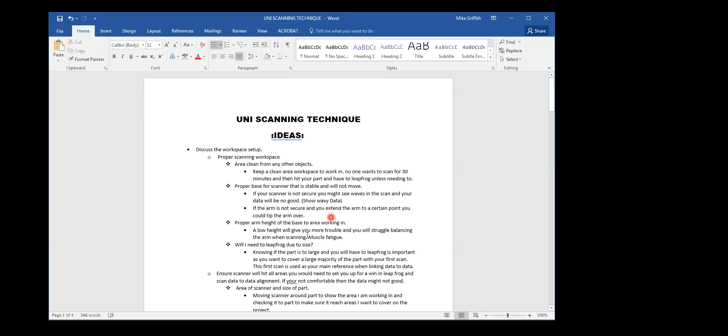The second thing we need to discuss is whether you will need to leapfrog due to the size of the part. If your part's too large, you need to know how many leapfrogs you're going to need, or how many times you're going to move the part around the scanner. It's important to get as much coverage in the first scan, as that will be your reference scan to leapfrog to all your other scans.

What I mean by that is when we have multiple scans, you could have 20 scans. In the first scan, we want a large majority of the part, a good percent covered. Then every scan will be locked into that reference scan, and each one will tie into it so that they link up and align very well.

You do want to ensure that your scanner will hit all areas that you want. Mostly you want to grab features that you're going to leapfrog to. When we do data-to-data alignments, you want good coverage of areas that will predominantly be your featured point data so that you can leapfrog successfully. I will show some of that later in the scans here.

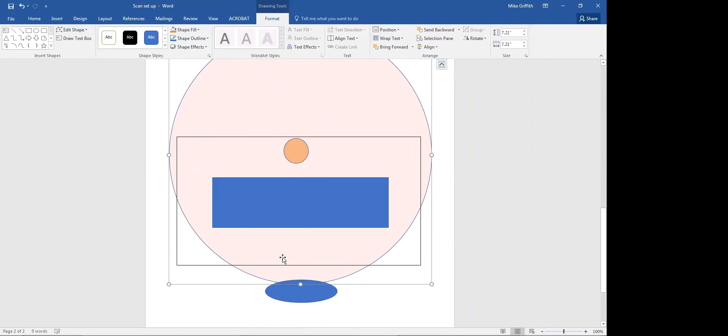And this blue square is my part. And I want the motion of the arm to be this outer circle. So if you can see this circle, I'm able to move around this part successfully and capture all areas of the part that I need.

An improper setup is one like this, where you can see here's the scanner, and I'm going to insert me into the picture. I'm right here. As you can see, the scanner is only capturing a small portion of the part, which means that I would have to leapfrog over to this corner to scan that much, and then probably leapfrog again to scan here.

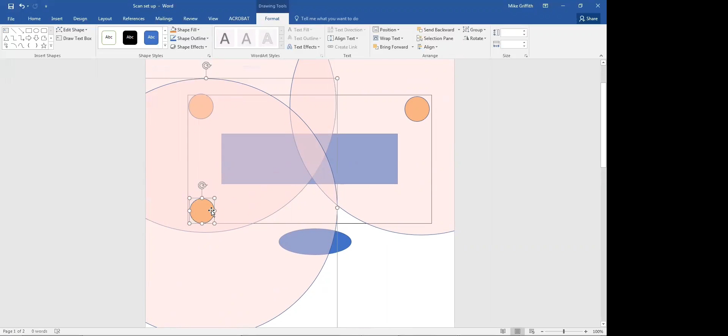So setting up your part successfully in the first place, like this, with the scanner away from you, able to capture all the part, is the proper setup. I've seen some where they've had it down here in the corner, and then they have to move the part 3-4 times to successfully scan the part.

So I do want to reiterate that this is really important, as the more scan data you collect, the more data you're going to have and the slower your computer will be in time. So just remember that this is probably the most accurate technique that you can have for setting up.

Everybody, can you see that all right? Yeah, we can. Okay. I wasn't sure. All right. We'll go back to this. All right.

The next thing I want to jump into is when to properly use developer spray on plastic or shiny metal, and when not to. I've dealt with a lot of plastic in my days. I did 6 years of scanning plastic, so I'm primarily really knowledgeable in plastic. I'm getting familiar with doing metal more. Metal's a little easier to work with than plastic.

So I'll have a diagram here to show you what kind of happens when you scan plastic. So I have 2 diagrams here. The top one is scanning plastic with no developer spray. Certain plastics, whether it be transparent, light colored, yellow, light gray, I've dealt with many colors.

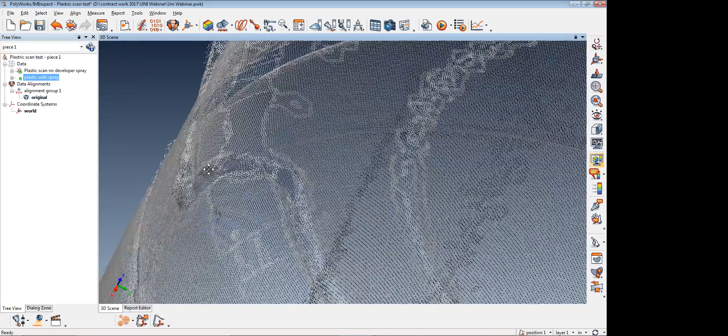So the first scan that I did, as you can see here, was scanned with no developer spray. As you can see, as I zoom in, you can see where the plastic is creating noise on the outside of the part here. I'm going to turn up these pixel sizes. So you can see it's hitting in the part, bouncing outside, creating a lot of noise.

You're starting to get jagged edges right here. And it's data that we're not really wanting. If we were to measure certain surface profiles of this cap, it would pick up these pixels and it would give us inaccurate data. This cap was yellow. I just used an Armor All lid that was sitting around the house.

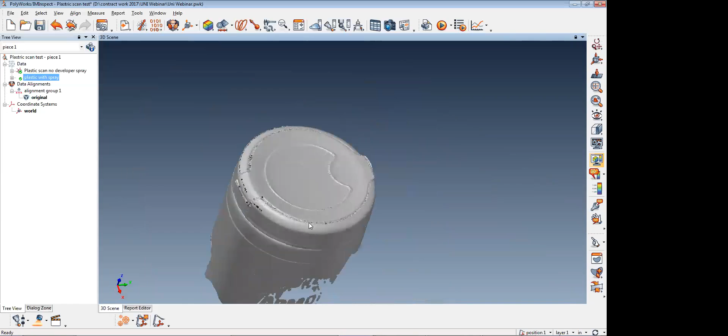Then I went outside and took the same lid and I scanned it with developer spray. It took about 2 minutes. And as you can see, compared to the other data, the areas that we were having difficulty with, the bouncing and the reflectiveness of the part, we now do not have any noise on the outside edge. So you really want to look for, is my laser transparently shooting through the part or not? If it is, this is a good indication that you need to use developer spray.

Another way of possibly getting rid of that noise is to check the intensity of your laser, which is in your RDS. And I'll show that here. In your scanner settings, right now I was scanning with 30%. This changes your exposure time. You can switch between different modes. Right now I have capture, so I can grab the arm, the 2 buttons on the side.

I point that laser at the part. I press the 2 buttons on the side, and it'll beep, and then it starts registering the exposure time on that particular part. After it captures that, it gives me another beep. You'll see the intensity of the laser go high and low. And sometimes that will just be all that you need. If that does not work, you'll have to really go for the developer spray.

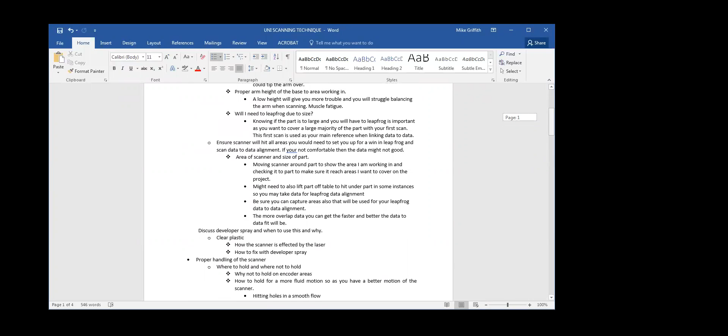All right. Mike, I have a question before you move on. Sure. Do you have recommendations for cleaning developer off the plastic parts when you're done? I just use water. Okay. Just water and a brush. The developer spray that I use is recommended that you wear plastic gloves when you're cleaning. But yeah, water, soap, it comes right off. It's washable. It's just you don't want to get it in contact with your own skin when it's in water.

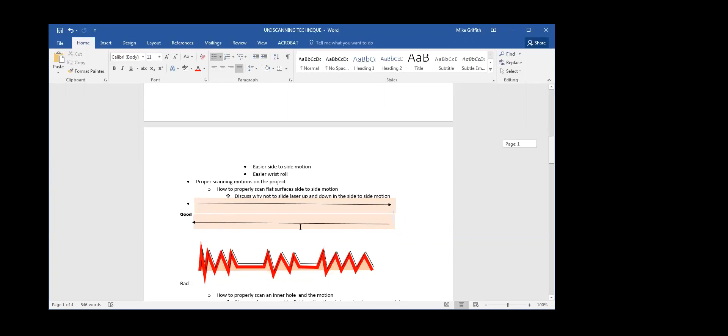All right. So now we're going to discuss a fluid motion of scanning, how to properly scan the part. As you can see in this image here, a good motion of scanning is a side-to-side motion. We do not want to scan sliding up and down. And I'm going to show you why.

Get a new screen here. Lots of screens. I'm sorry, guys.

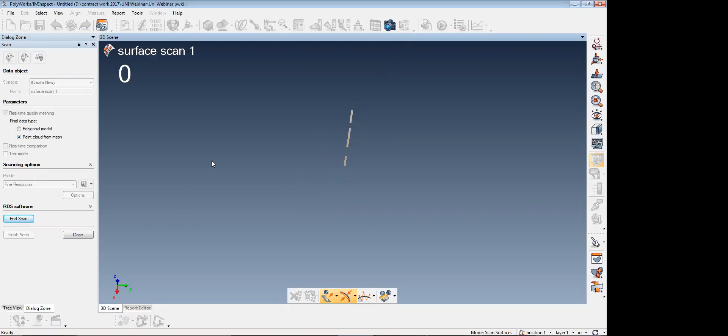Yep. So as I'm scanning, and I have a part right here in front of me, we want the motion of our scan to go side to side. So as I'm scanning, I'm going through the part. I'm at the edge of the part. I'm going to scan right back through the part. We just want a back and forth paint motion of the part, like so.

We do not want to give an up and down motion. Now I'm going to pretty much do the same scan, but I'm going to kind of rotate my wrist up and down and scan, and you'll see as I scan up and down, we start to miss data.

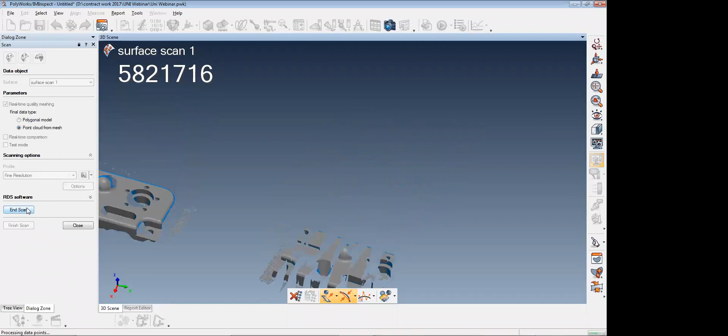So you can see as we're scanning, you really want a good paintbrush motion across the part, as it'll capture as much data as you need. I've pretty much got a large majority of this part in the first scan, and we're going to have to scan quite a bit if we were to do that motion on this one.

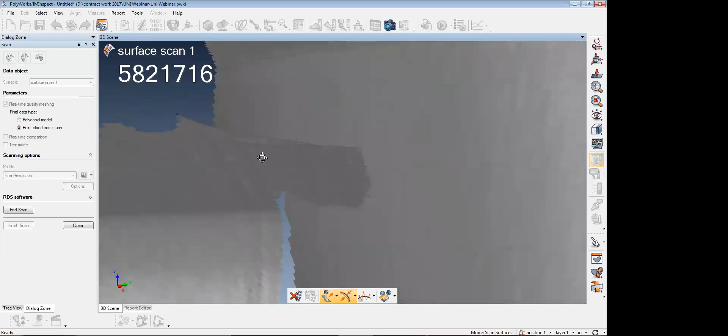And also, as you can see here, I'm going to zoom in a little bit. As you go up and down with the scanner, you can see that it's starting to create ripples in our scan. I've done this many years, and it's really hard for me to even get those anymore. But you can see we have one there. And it'll cause some inconsistency. There's a really good one right there.

You can see the inconsistencies in the surface as far as how not to put the laser in and how not to drag the laser up and down with it. You really want to go across the part with the laser covering across the part in the side-to-side motion. And we can kind of see how smooth my scan is here. There's not really any vibrations. We got a little bit here, but that's because the laser is starting to fade off on the ends.

So I've stopped about right here. I could have finished and it would fix that. If I came on the back side of the part, it would fix that. So really just maintain a very good side-to-side motion. Right here. Don't go up and down.

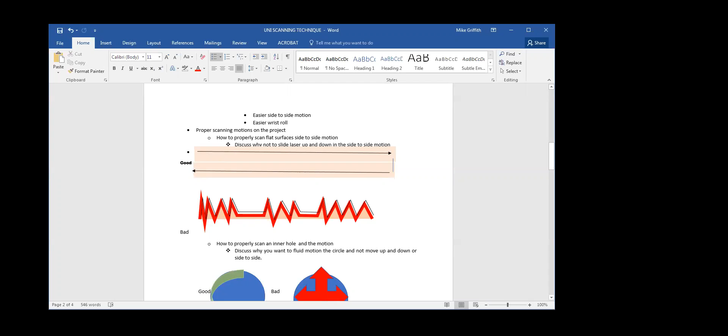Now we're going to talk about how to properly scan an inner hole and the motion. When we discuss holes, this could be holes, the top of caps, the top of cylinders. We really want to create a rotational motion of this. We do not want to scan straight side-to-side motion. And I'm going to show a little of that. I have a demonstration here that I did.

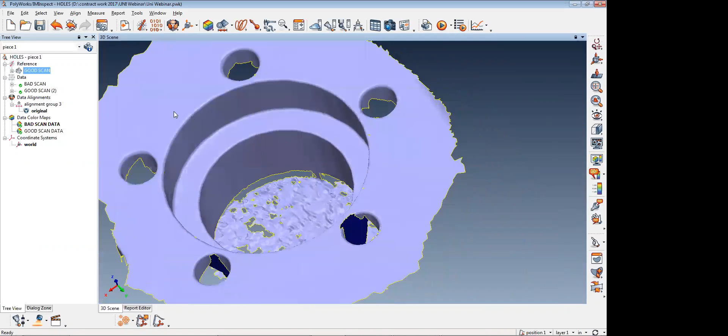All right. I'm going to turn that off for a minute. So this was a scan I did yesterday. I cut off all the other excess so we can just look at the hole. As you can see, there's very little ripples. These little ones that you see are just the pixels of the actual scan. It's just polygons. So I did a bad scan.

And as you can see, the scan here, what I did was I took my scanner and I took my hole and I went down the hole in a downward motion like so. Just like that. Now PolyWorks has a built-in plugin for a surface to normal angle. That is this blue area.

What that means is that the scanner is at such an angle that the software is trying to interpret the surface, but we are beyond our scope of 55 degrees, so the scanner is suggesting that we rescan the surface to make sure that we are accurately capturing the data there. The other is the curvature. It's low scan density for mesh curvature.

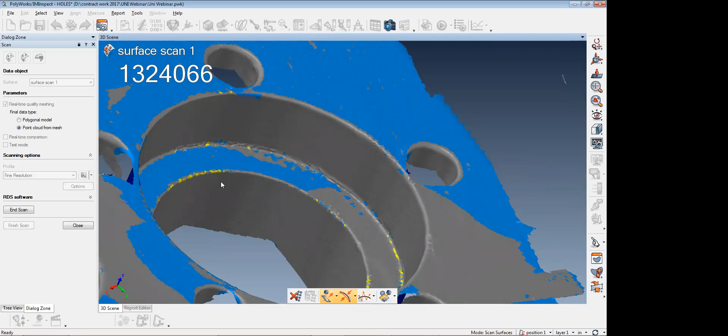So essentially, it's trying to build this curvature, but it's not sure, because we were coming down at a direct angle onto this surface, where the angle is and the curvature of that curve is. The proper technique that I'm discussing is to, we'll hide that one, take your hole and shoot the laser in a curvature motion, at least a 55-degree angle.

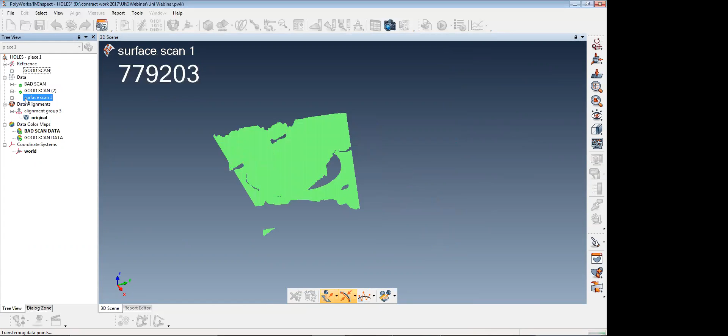Oh, sorry. Yeah. Like so. And all I'm doing is sweeping, motioning, and it's showing me the blue is a little high on my angle, so I just brought my arm up just a little bit more. Now you can see I've got the right angle, and I'm starting to sweep motion around the hole. Like so.

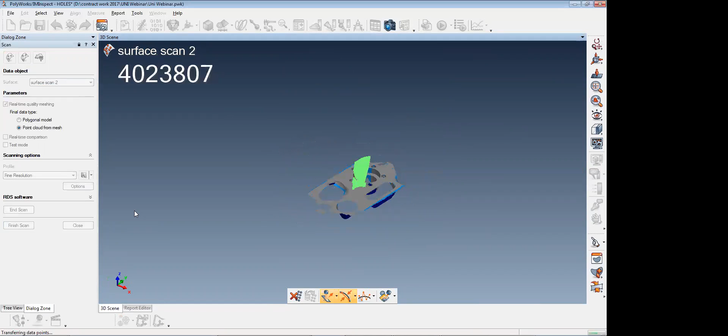And as you can see, with a little bit of practice, a little bit of time, I have a little bit of areas that I need to finish. Just need to probably rescan one pass right here in the curve, and I can cover most of the part with the software. Hardly suggesting anywhere to fix or rescan. And you can see the clear data there. This is with proper scanning.

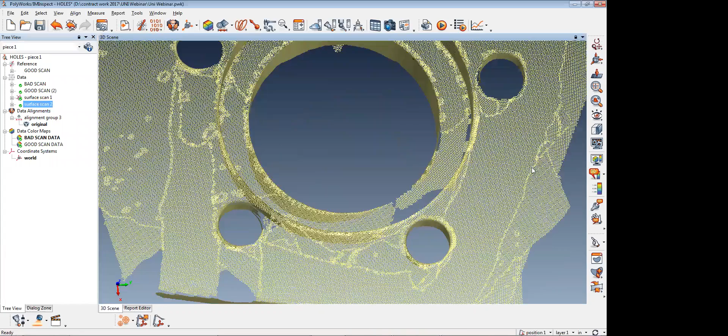And here's the data without. And you can see the different ripples that are in these areas. You can see the density of areas. And what you come up with is what I have here. This is a scan that I did earlier today on that same pass. And this is the color mapping.

And as you can see, I have a few areas that are just at 5 thou. I have 2 thou. But we're pretty close to the surface as much as possible. When I match a bad scan to the surface, you can see how we're starting to get a lot of error inside. I've got 5 thou, 8 thou, 4 thou. I've even hit as far as up to 8 thou in these areas.

So as you can see from the data, doing a rotational motion, if you're trying to get a couple thou more out of your scanner, rotating through the actual cylinder at a right angle will give you the better scan of a hole. Does anybody have any questions on that?

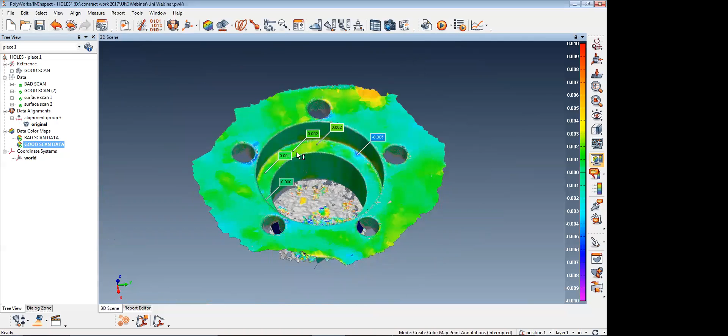This is Lee. I have a question. So is this going to apply if you had like a cylinder as well? Would you go around the cylinder on the outside in the circular rotation? Yes. Okay. Yes. I'll grab a cylinder here for you. So I'm going to do the good pass first on the cylinder.

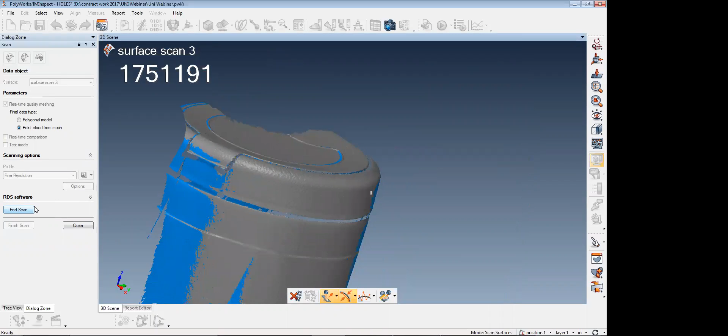So as I'm directly out of radius on the cylinder, I'm going to kind of scroll around the top of it like this. So you can see right there, I captured the smooth data there. And you can do that just all the way around. When you get to the sides of a cylinder, we're going to discuss that. But as far as the top corner edge of a cylinder, you want to do that motion.

And now I'm going to show how if we go down, a downward motion, we're just going to go up and down. As you can see, the up and down motion didn't capture anything on top. And the arm just finding that right angle to capture the data is just not there. So you'd have to take more scans really to get acceptable data.

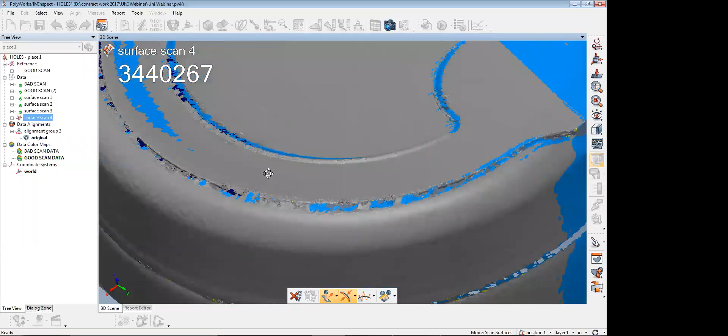So I went to the top, and as you can see, the noise, this is the same part. So no noise, very smooth inside this, and it's maybe a millimeter or two hole there. We're getting very smooth data there. And as you scan up and down, you can see it's very jagged. There's some noise sticking up all the way through. We don't need that. We don't want that. We want very smooth data, very smooth lines, always.

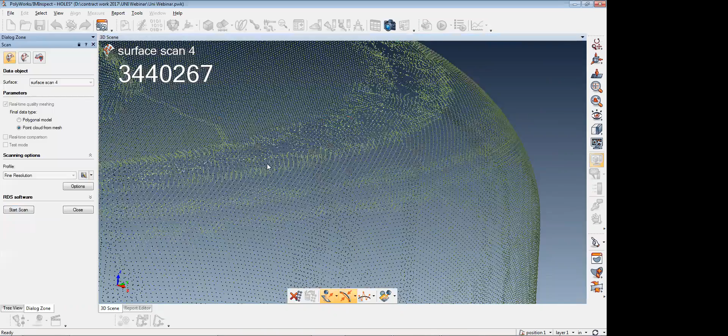And here's kind of a picture of the noise. Can you see that all right? Or do I need to bump these up? So you can see all the noise that's running around in our scan. Whereas if we zoom in, there's no noise there. We can see a smooth edge in that one. So it is necessary when you're doing corners also to do that. And I have a corner check here that we're going to do in a bit. Does anybody have any questions on holes?

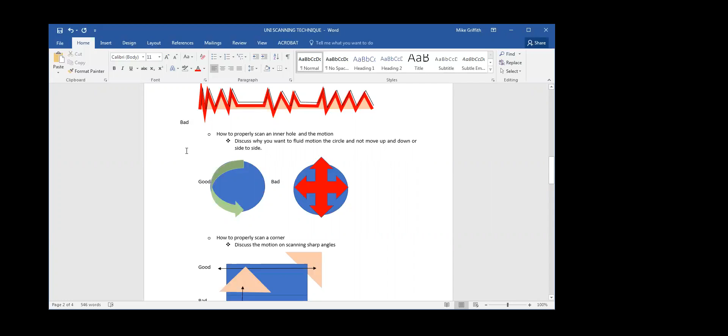All right. I'm going to go back to our page here. So the next scanning technique that I'd like to discuss is any corners or edges. As you can see, I have an image here. We want to go with this being the corner edge. We want to go with the edge in a sideways motion. This is our scanner. So we're going to kind of go like this on these corners, and then we would go like this on our corners. You do not want to go on the edge and scan like this. And I'm going to pull up a corner scan.

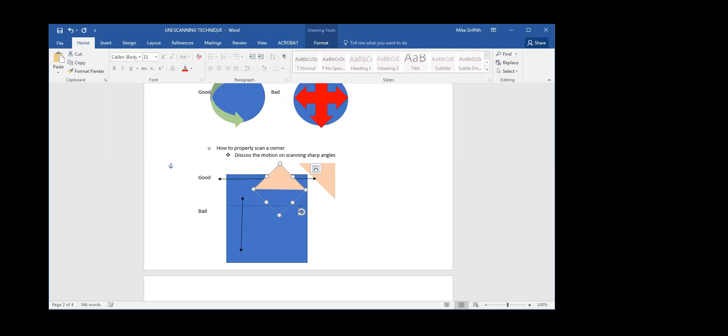Give it a minute here to load up. All right. So we're measuring corners or edges. We really want to define our corner. We want to get it in the proper 55-degree angle that I have on my scanner set up. And we want to go in a side-to-side motion, covering both sides of the corner.

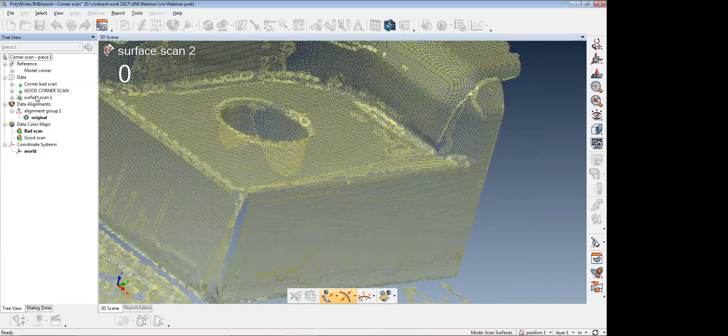Sorry if that's small. Like so. Just like that. And we do not want to scan in an up and down motion. Like so.

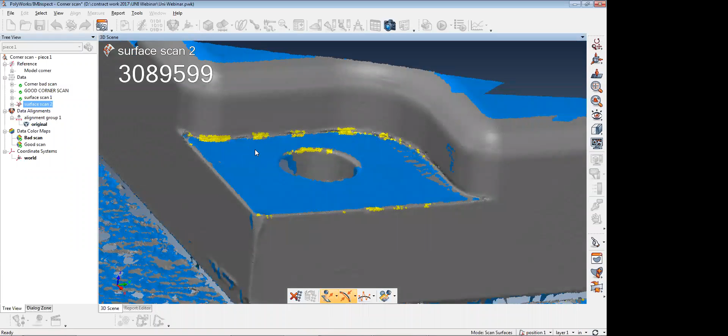As you can see, we're getting some curvature errors on that scan. We're getting some surface errors here as far as knowing if it's the right angle that the scan is. And when I scanned the proper way, you can see we have a little bit on top. I can just do maybe one more pass.

It would fix this area. And I could do another pass here in the corner to fix this area. And maybe a radius scan pass to fix this area right here. And then we would be done. So it would probably take another 4 or 5 in the bad scan and maybe 1 or 2 passes to fix the good scan. And then I'm going to show you some examples that I have set up.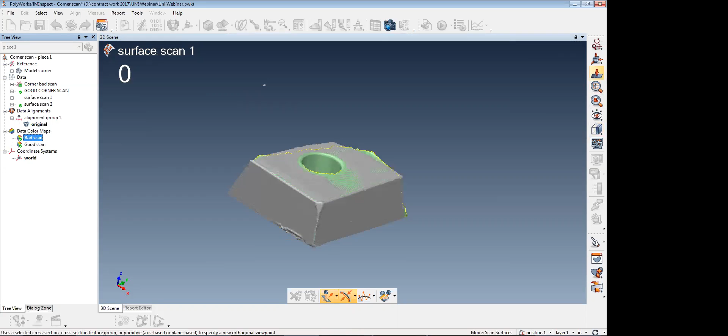The first one, I'm going to show the corner bad scan. I'm going to show you the color graph of that. So as you can see here, we got some areas that are sitting about 6 thou, 5 thou, even some that are hitting +5 going -5. So we're looking at 10 thou overall error in our scan.

And then the next one I'm going to show is a good scan in the corner. And as you can see in the good scan, the area that we were hitting 5, we are now hitting 1 to 2 thou in those areas. So we're looking pretty good. I would be very comfortable with a scan like this. Does anybody have any questions for corner scans?

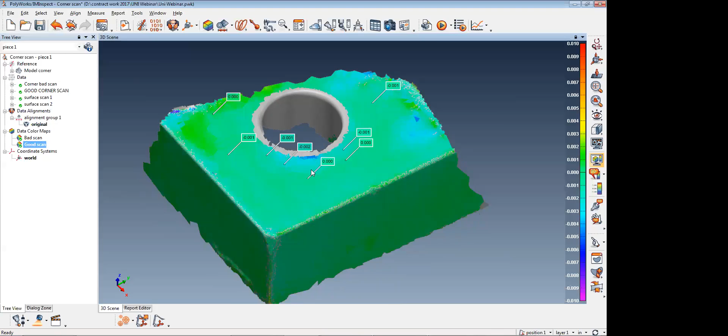All right. So the next technique I want to use is when scanning outer curvatures. We kind of discussed that. Scanning in the outer curvature of our cylinder, you want to go at the proper angle, like so, and then scan in a circular motion, like so.

Once you do the top, we will move our scanner like so, and we will scan down the actual cylinder and then back up the cylinder, or you could just scan down and down, whichever you prefer. I usually just go up and down like so.

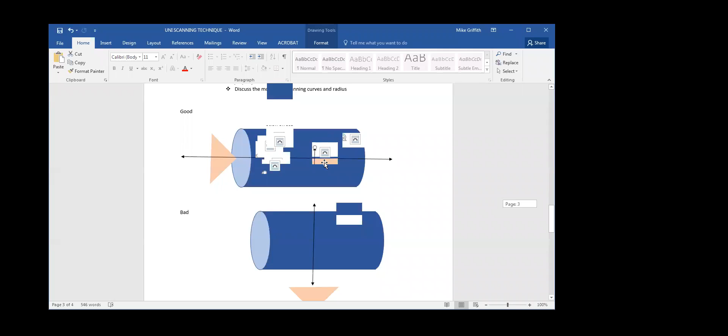Some of the bad techniques that I've seen is I've seen people scan along the radius like so. This is incorrect. As your scanner starts to hit this edge, you'll start to get noise shooting up and down off the side of the part. And I'm going to show an example of that.

Give me 1 second here. See that all right?

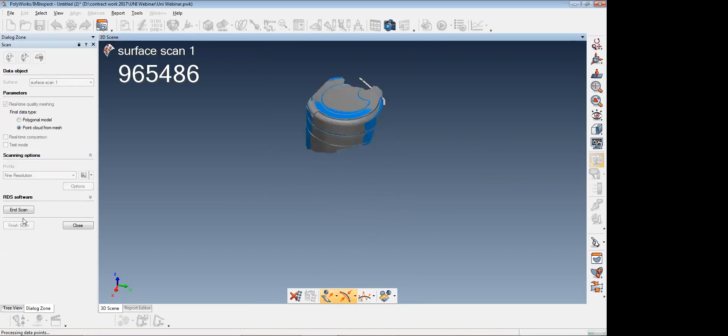So with this cylinder, on the curvature, like I said, we're gonna scan the edge of the curvature first on the cylinder, whether it be a sharp edge or a soft edge, or a radius edge like so. And then we want to scan up and down the radius edge.

This will give us smooth data. We have some curvatures in there. I don't have any developer spray in those areas, but as you can see, the actual radius areas are fairly smooth. We're not getting a lot of breakup in the scan data. I don't see any noise.

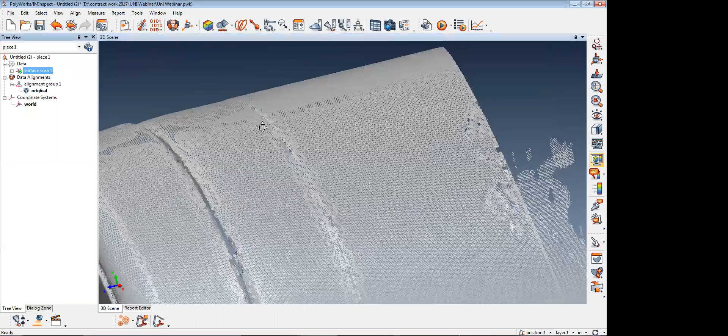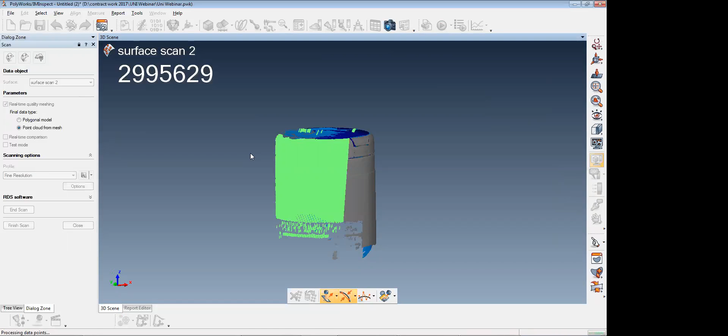The improper way, which I'll show now, doing a side-to-side motion. We'll start to get tearing on the edge of the part. You have to scan a lot more to make your passes.

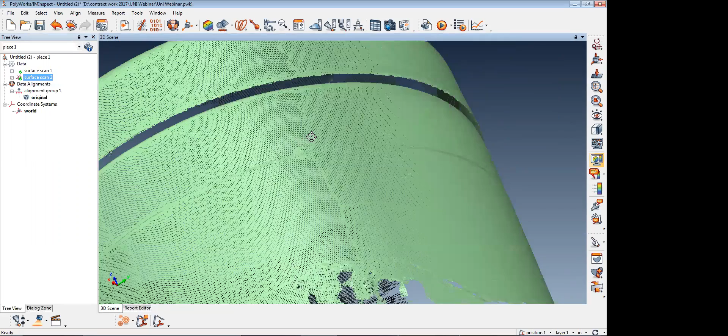So as you can see here, here's a ripple. So we're starting to get some ripple effects. It's kind of hard probably to see on my screen, on yours. When we look at the final mesh, you can see how we have a ripple there. That's 2 scan passes trying to connect. It's trying to build the mesh, but it doesn't know if it's in or out.

We have multiples here, as you can see there. And here's another one, and another one. And we're just trying to alleviate that ripple effect, as these data points will clump, and then you have more data that you need. This will cause a little bit of error. It might cause a wrinkle in your scan, and then if you're doing a surface profile, that wrinkle, if it be 3 thou tolerance on a surface profile, it might not pass in that area.

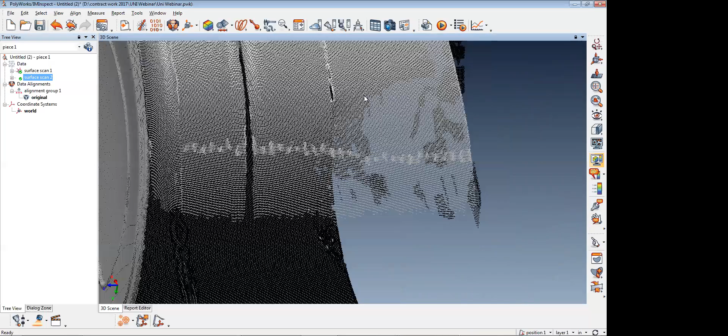Whereas you can see, most of my data is very clear. I have a large amount of data here, but that's because there is an actual curvature feature there. I don't have too many rips and tears in the scan. I have a little bit right here. Once I overpass that, it would correct it. But it's fairly smooth and not too many multiple scan overpasses like there.

So there's clean, there's not clean. So Mike, if you have a bad pass, can you just go ahead and scan over it again, and will it correct itself? Would you like me to, I'll scan the bad one, and I can show you what that looks like. Okay. So we made some multiple bad scan passes. Now I'm going to scan over that area using the proper way.

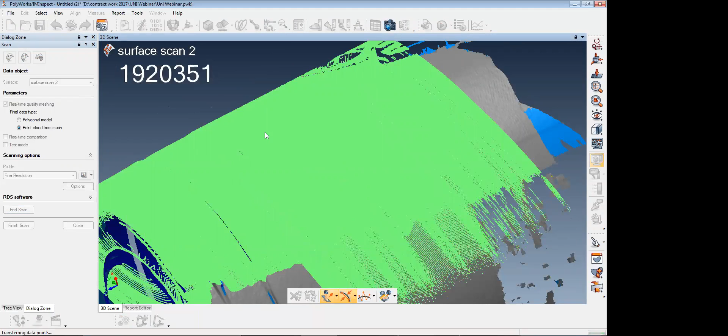Right here, right? So as you can see, the software is smart enough to know, but we still have multiple scans on top of one another. It doesn't know when you stop and start. As far as PolyWorks, because PolyWorks does have a play scan feature involved with it, so it knows when you're scanning and when you're not scanning.

If I converted this polygonal model, these would show up as polygonal models. So if you have anything that has to do with your polygonal model, all these features will be little small polygons, and it would be a lot of data. Whereas right here I have just a very small amount of it, and here I have a large amount of it. It just keeps overlapping because it's not knowing where the good data and bad data was,

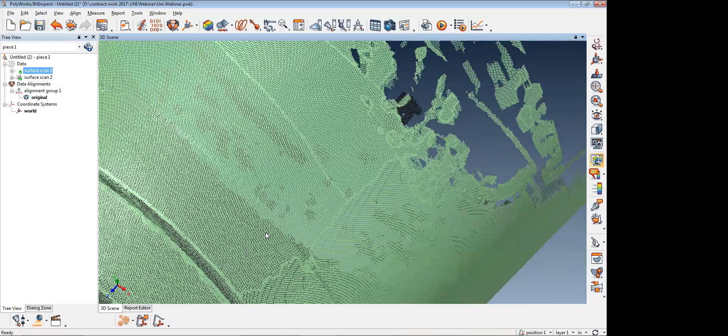because we scanned two different styles. You can kind of see where this was my good pass on top of my bad pass, and so you can see the bad pass below it. And it might be under 1 thou, but when we're trying to capture the best data possible, we want to eliminate as much noise as possible and have really good data right off the bat. Make sense? Yeah. Okay.

So one more question along those lines. Are you trying to do it in the least amount of passes as possible then, so you don't have overlapping data? Yeah. You don't want to continuously overlap data to data. You could get noise. Maybe the light shines on a certain area and it reflects off, and you didn't do any developer spray, and it gives you a lot of noise. So if you properly scan it, it might not give you that.

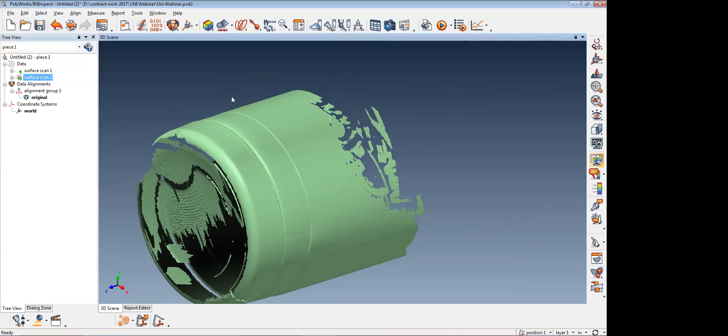If the part's a little shiny and the light's shining on it, it could give you a lot of noise if you're going around the radius of the part, whereas if you're going with the radius. So it would shine down as you're scanning here, it might reflect off, and it might give you noise on the backside. Don't know if I have any on the edge. This part is kind of sprayed, so I don't see any. That was my good scan right here. Yeah, I don't really have. You can see some right here.

But you can see how smooth my data looks right here. It's very smooth. The data is lined up. If I converted that into a mesh, these would convert very well into a mesh. Very good polygons. Whereas here, I would have good data here, then I would collect a large amount of polygons there. And when you're trying to limit the amount of polygons, you're going to double your polygon data. And then that part that would have been half a gig size would now be a gig size.

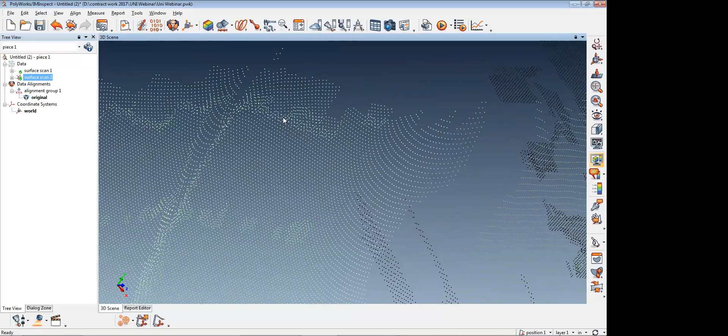And then you're looking at having to transfer that or having to convert it down, and then you're losing more data. So it's just a matter of capturing the best data possible without creating a very large file size, and also not creating noise and not creating bad data, as I showed you in the color mappings that we did in the other projects. Does that make sense? Yeah, thanks. Okay.

All right, we're going to move on next. Now we're going to show you how I would scan a whole project. I have a demo plate here, so I'm just going to use all these techniques to properly scan it. I kind of have a diagram here. In this diagram, this is our scanner.

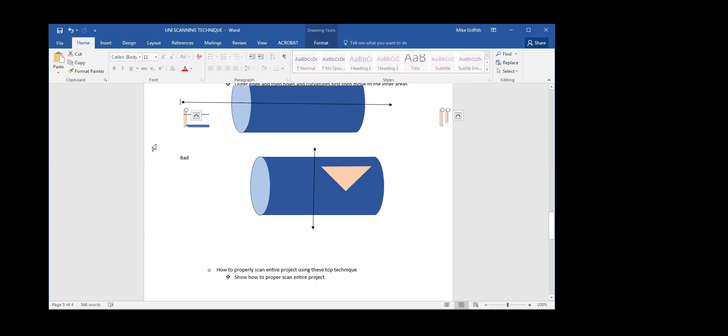So a good proper technique is, I don't have any features in the middle, so we're just going to say it's a square block. The proper scanning technique is we're going to scan the edge like so. And this is the corner. And once I get to this edge, I'd rotate my scanner, scan down, get the other edge, rotate again. We're going to move along this edge.

We're going to rotate, and then we're going to scan this way. So that locks out all of our very hard features, our edges, our corners, our radiuses. And if I had a hole in the middle, like so, then I would come over here, I would scan. Scan in a radius around this to get the edges.

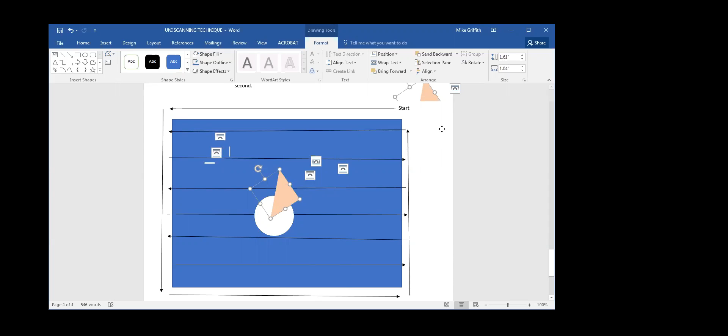And then once I'm done with that, we would then start to scan a back and forth motion on the part. And you can have your scanner just a little bit angled so that it kind of shoots elongating across the part. You don't want to go too much, but just kind of like so. Then I would come here, scan like this, scan like this, scan like this. And then I would go back to my hole and then do my inside rotational scan like so. I'm going to show you that now.

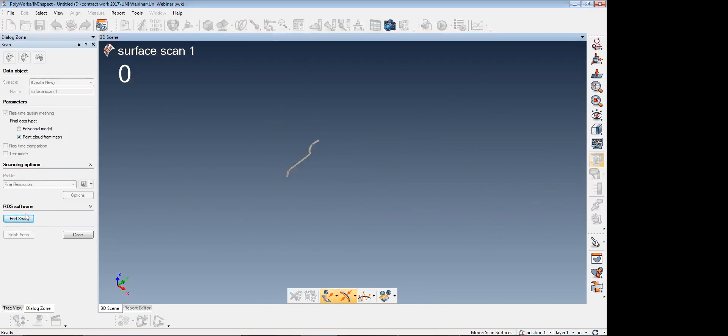All right. So I have a demo block here. It's fairly large. It won't take very long to scan, but I'm going to scan. I'll start on my proper color matching to it. I'm just going to kind of scan the edges, radius right here. As you can see, I don't have any blue on the top and I don't have blue on any side, so I'm at a proper angle.

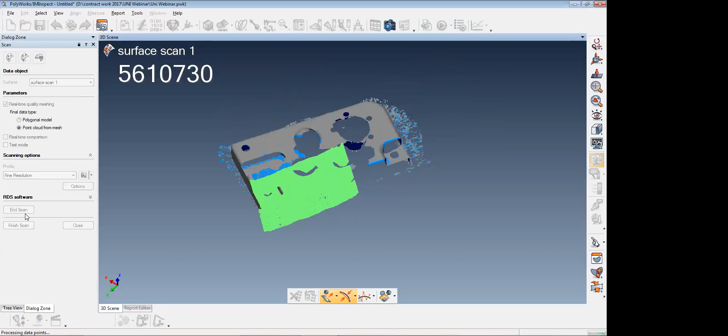I'm going to curve around this curvature here. Continue around the front side. Continue on the outer edges. Make sure that I have all data that I want. A little bit off on this. This is the back side. So I'm going to reshoot this area first. Proper angle.

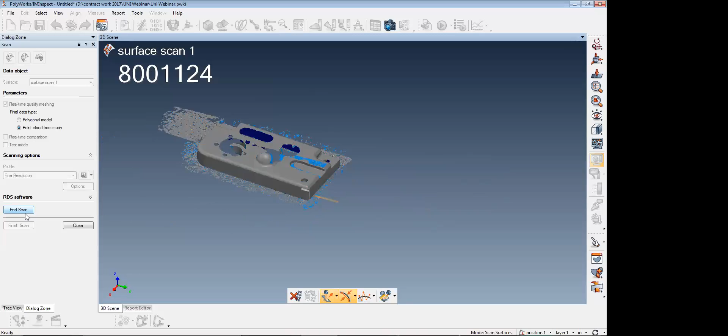Now the data that you're seeing here on the bottom of the part, that's my table. It's just my kitchen countertop, so it's very reflective, so you can see it's not collecting data there very well. Now I'm going to grab inner features. I'm doing a slot right now. We're just going to sweep around these radiuses as much as I can. I have a cone here. I'm just going to sweep around the edge of the cone.

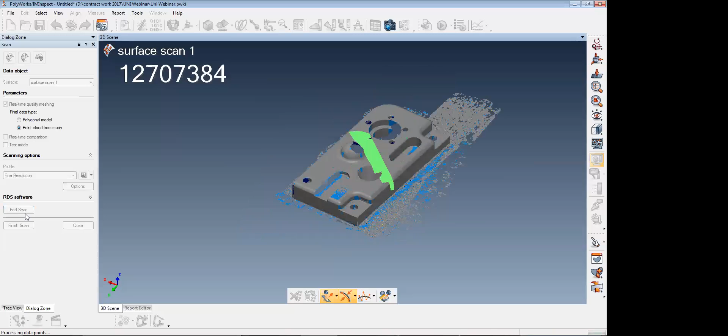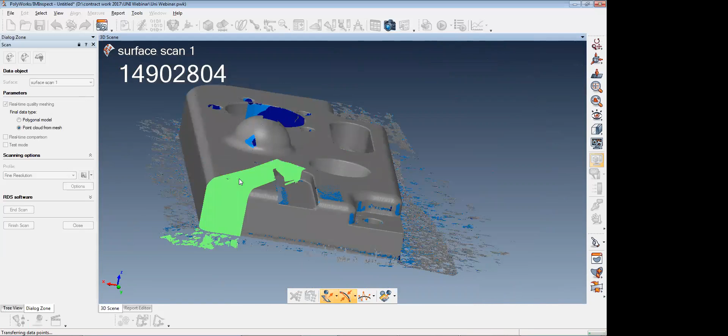As you can see, here's my slot. I have a little bit inside the scan. Here's my cone. You can see I just have the bottom feature to scan. My edges are looking pretty good. I have a little bit of data to fix there, but overall I'm happy with it. I have a little bit right here. Gonna fix these areas.

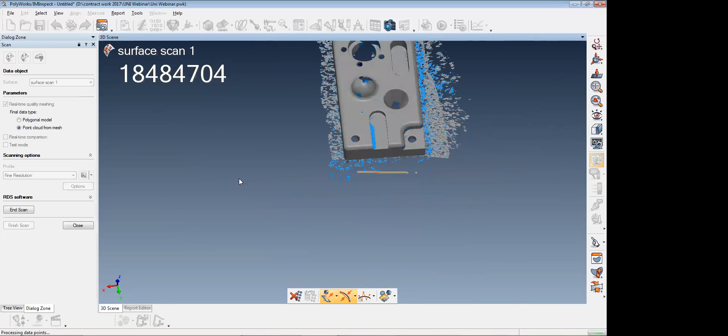Now I'll move on to this feature here. I'm going to sweep around this radius. Finish that feature. Yeah, I got a little high angle on that edge, so I'll just angle up a little higher. Get to that bottom floor. And I need a little bit inside more. So now for that wall, I angled down onto that wall, so I'm a little bit more direct to that wall surface. Let's fix that wall there.

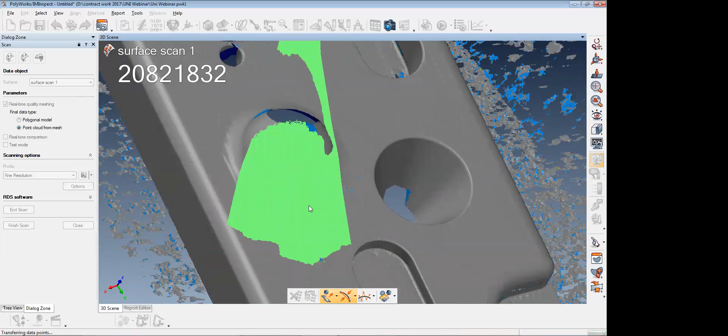The sphere, I pretty much just kind of go around in a radius like so, starting from the bottom, working my way up. I have a little bit on top. We'll just get a little higher. Like so. A little bit there, but I'm okay with that.

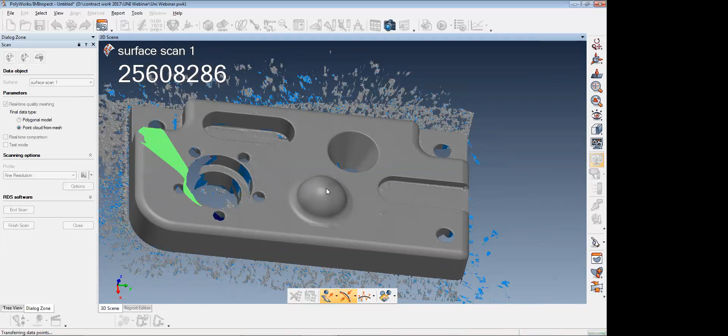Then we move on to the hole, which I have right here. Try to catch the proper angle. I'll take my first pass. Look to see that I'm covering it right. Looks like I'm at the right angle. Now I can just continue to scan inside.

And then all we have left is this cylinder here. So the cone just acts like the cylinder. We're going to shoot just down the feature as much as we can. Try and get an angle here so you can see.

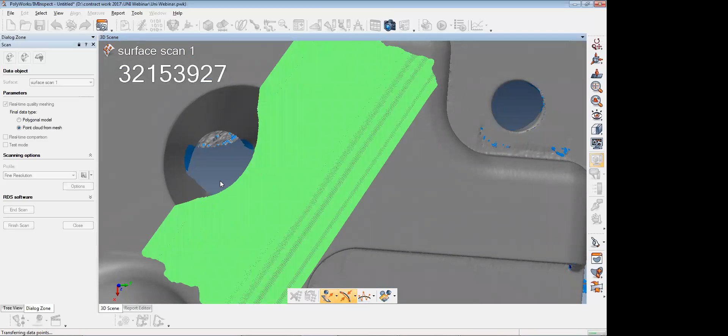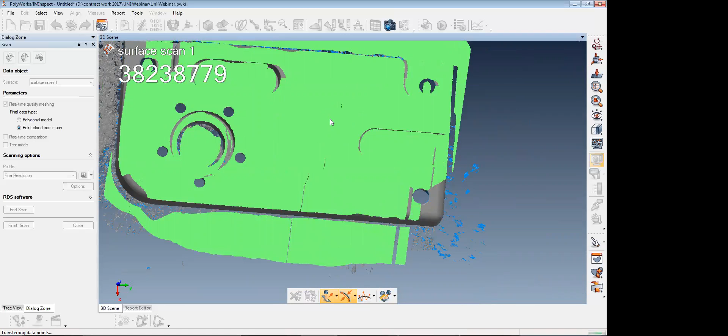Now we're going to scan across the top of the part. And get that corner first, then we're going to scan side to side. Like so. Then when I'm done with my scan, there you go. We have a little bit right here. This part is metal. There's a little bit of paint chipping off and the shiny metal's coming through. I would probably delete this scan here.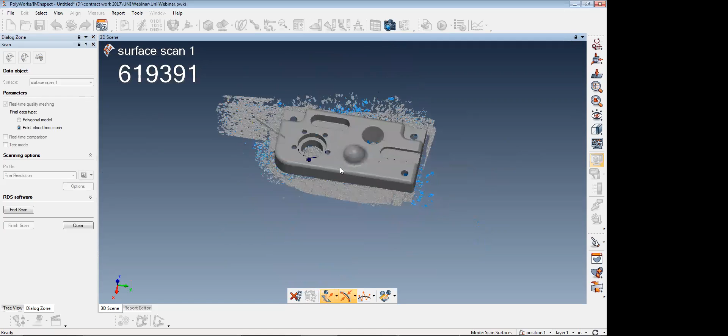Like so. Rescan that area just to make sure that I use proper technique. Sorry, so that is a misalignment. It's probably from me walking on my floor. I'm on a wood floor in my office. So you can get that every once in a while. Just delete that pass. What that means is the previous scan you had is not matching the scans that you are working on. So it is past my tolerance limit that I've set in the software. And it tells me I should delete that, rescan the area. Might have put my countertop here.

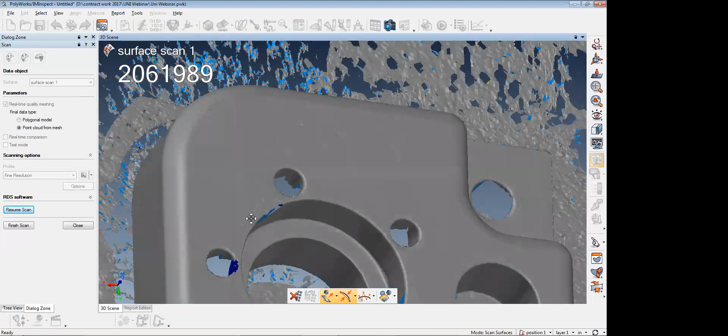So as you can see, we eliminated that edge now. And the same applies to holes. You can see most of our holes are already collected. We don't have to really go in and scan them. We pretty much grabbed as much data as we could in them.

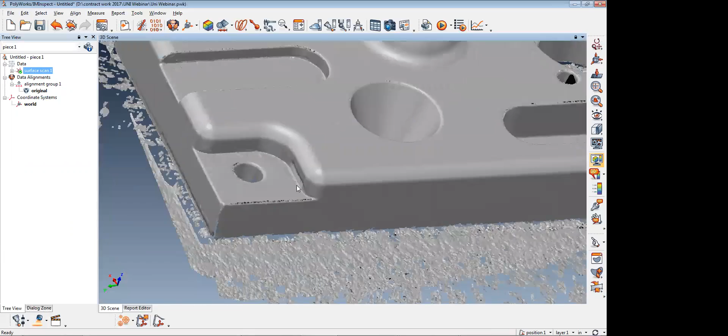Mike, could you take a step back and show us how you deleted a portion of your scan? Yeah. So here's a bad corner right here. So in Polyworks, which is the software that we're using, I do believe you guys have that too. You want to hit your space bar, and then you have the option of paintbrushes or selection of contour or selection of polygonal. So I can show you a few.

So the paintbrush is just a paintbrush. I'm mouse wheeling up and down. You can select it like that, or you can drag wherever you want to delete. And you want to make sure that you have this volumetric turned on right here. If you don't, when you delete, it won't delete the actual surface. You need to grab the volumetric, and then it deletes the volume that's in there.

The other options are the contour. So you draw what you want, it selects, you hit your delete key. Another is polygonal. You just polygonally draw where you want, and then delete there.

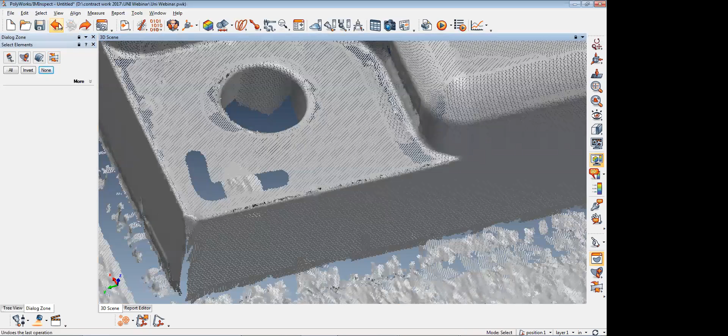And then let's say you paintbrush an area and you're like, oh, I grabbed too much, or you grab the feature you don't want, you can just hit this none button here, and that'll erase it. So if I want this corner here, I can hit delete. I can undo that if I want. I can undo all the ones I've done by hitting this undo button there. You can also invert your selection. So if you grab this corner here and invert, you grab everything but that corner.

So if I'm just solely working on this sphere, I can go in and grab my ball tool here, and just select the whole ball. Invert, hit delete. Oh, it's not going to delete today. You can invert it like so. And I believe it's that one. Like so. And then now you just have your sphere.

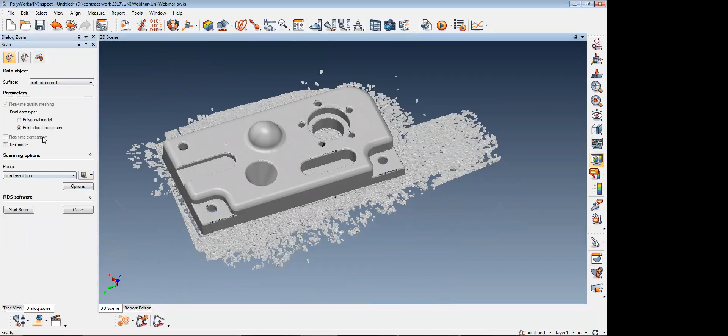Okay, so you were using a selection tool and then just using the delete key to delete those. Yep. Yeah, I was just using delete. So you can do it on pretty much anything you've scanned, and you can do it while you're scanning. I primarily do it when I'm scanning. So while I have my scanning open, we'll convert it here.

So as I'm scanning, I can come in and I can see the back face here, so I can see I got a little bit of bad data there. So I would just go in, select this corner, delete that corner, and then come back in and reshoot that corner. Okay. So I can reshoot it here. I moved my part, so I would just rescan that corner. And then that would be all you need to do. Okay? Yeah, thanks.

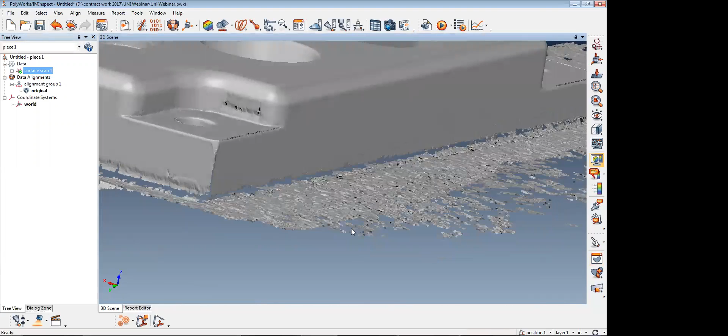So does anybody have any questions on scanning features and then properly scanning it? So primarily, I really work on the outside and cover as much. You see, I covered probably 70% of the part just scanning the outer edges, and then I went in and just rescanned my features.

Tried to cover as much as I can. While I was scanning here, it was collecting data over here, and after a certain point, you kind of start to feel the motion that you're moving. You want a very fluid motion. You want to kind of continuously work organic with what part you're working on.

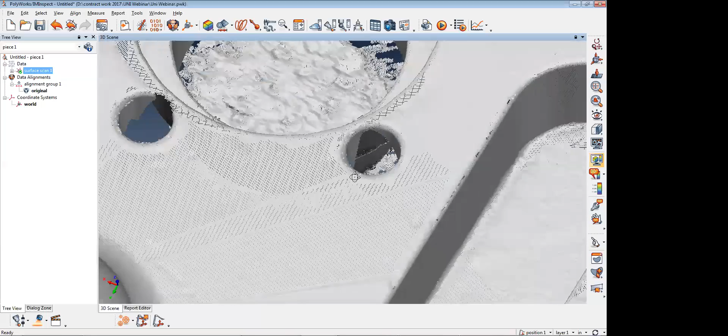These holes here are very hard. Scanning up and down, getting in these cylinders is just really hard to get in. The scanners aren't made to get in very deep holes. I can get the edges. I can get quite a bit in. I mean, you can see right there, I've gotten quite a bit distance inside.

If you're collecting very inside deep data, it's going to take a little bit more time to go in, get in these, get them refined. I did this one really fast, so I have some really bad data here that I would have to get rid of on some edges. But overall, once you know what to look for, these are kind of noise and tears.

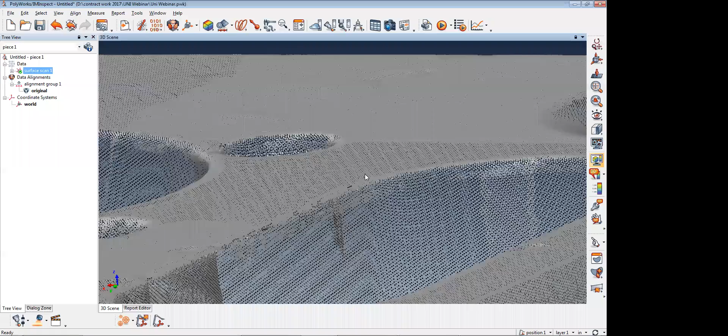You can see. Try and zoom in there. Get in there close enough. So you can kind of see the noise. They're a different color here. They're kind of bouncing off the part. It's just because the part edges are shiny metal and I didn't use developer spray, the laser is shooting down.

It's hitting this really sharp edge that's there. And because it's really shiny, it's kind of reflecting off a little bit. When I did my scan pass on the top, it probably came in, reflected out right here. So that's why you want to be kind of in a line across this corner first. And the same as here. It's shiny metal right now that I'm using, and I should have probably sprayed it before we did this.

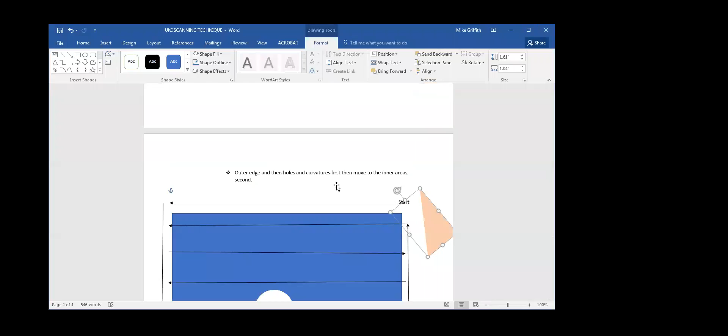That's all I have for proper scanning techniques. Maybe we can do some questions if anybody has any questions on anything. I can kind of show them if they have a difficulty with certain scan passes on certain areas. We can kind of leave it open for that now. Looks like we don't have any.

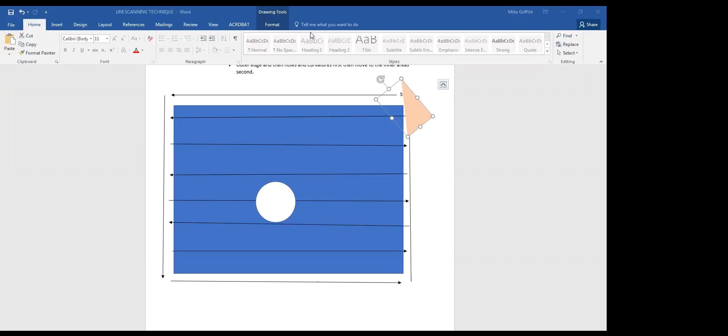This is the DF developer spray, but you do want the ENF developer spray. I get that at, what is it, S&J Smith, the welder. In Iowa, that would be a predominant location that I would pick it up at. It's usually 9 to 12 a bottle. But I've seen some gentlemen use foot powder. They use just your average foot powder, it's a little bit cheaper, and they put that on the part also.

So that's primarily what I use. I've used that for 6 years. I've liked it. It coats the part really well. You don't have to spray like a paint can; just one light spray and it'll cover the area that you're doing. I'll kind of put my webcam on and show you what it looks like on this.